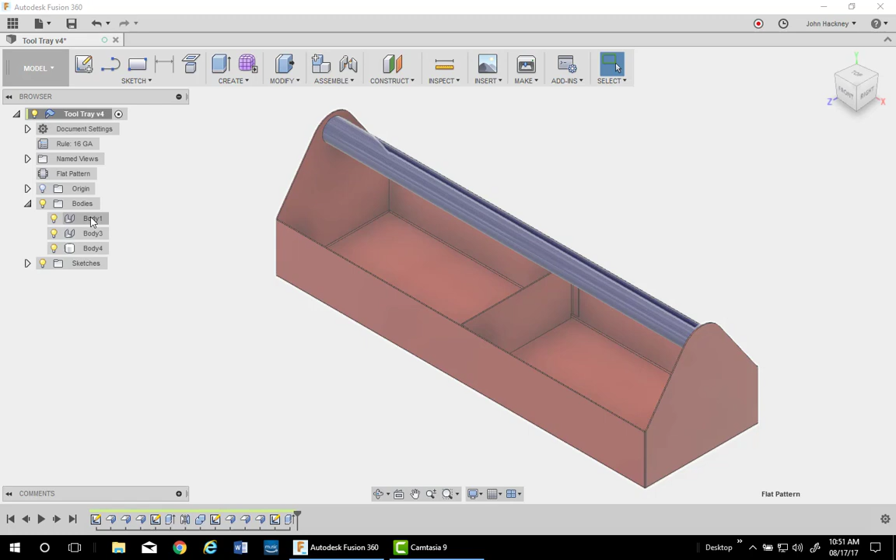I would like to demonstrate the sheet metal functionality of Autodesk Fusion 360 to make this tool tray. It consists of three bodies, the main body and a divider. The handle is not a sheet metal piece, so I will not be making that, just a piece of pipe. Let's get started.

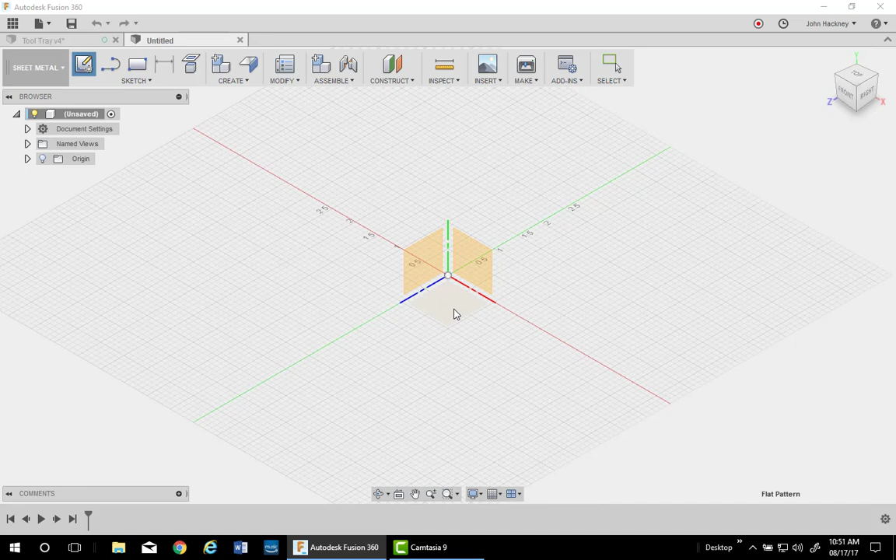Switch to my sheet metal environment. I've already pre-configured my sheet metal style. It's a piece of 16 gauge, which has a very narrow gap for a linear weld. So I'll go ahead and make my sketch on the XZ plane. I'll do a 2-point rectangle.

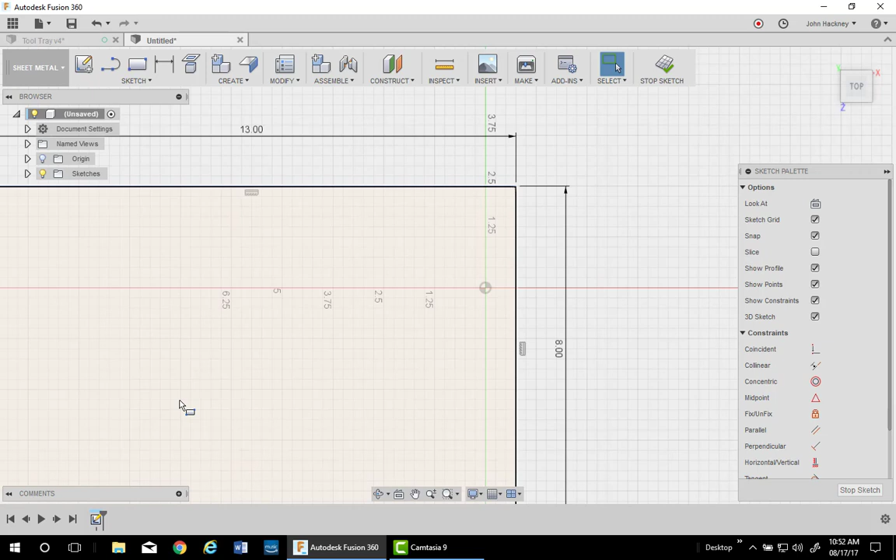I'm a fan of sketching off the origin so I can see the sketch constraints work. My total tool tray is 26 long, so I'll make this 13 and 8 wide, and I have my rectangle. Now I need to center this edge up on the origin. A coincident constraint from the origin to the midpoint. Now you can hold down the shift key and find the midpoint very quickly. Very nice tool.

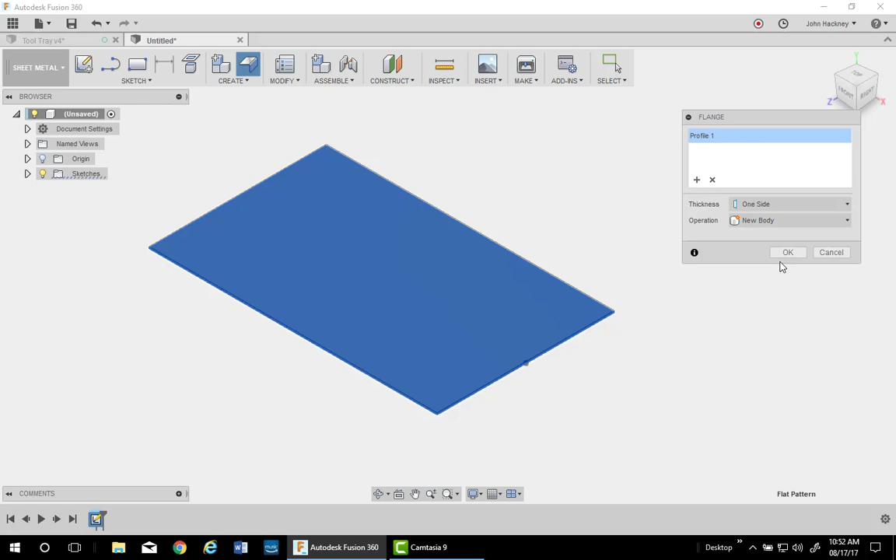Now if you have a closed profile and use the flange tool, you get a face. So there's my 16 gauge face. Now let's go ahead and make the flanges. I need 3 of them, so I select 3 edges and I'm going to drag them up 4 3/4. You can also type it in if you want.

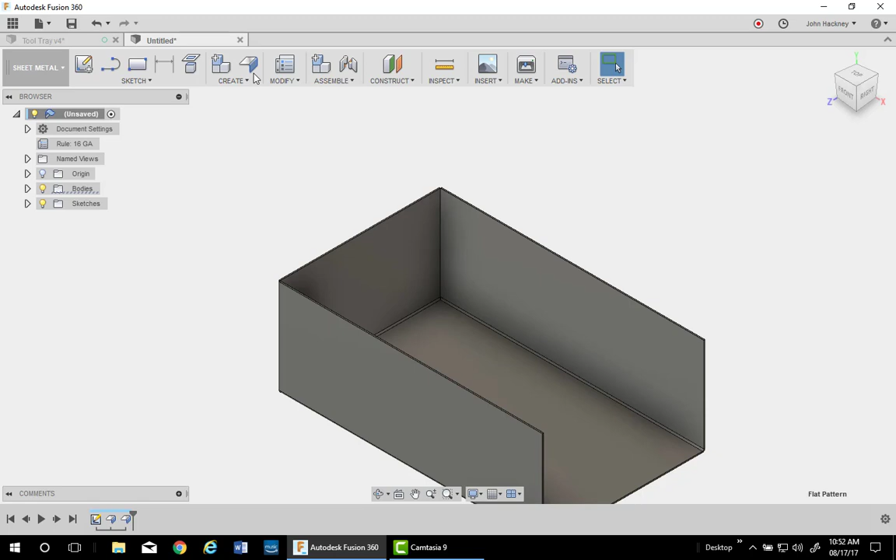Now I need that end section. I actually need a face up here hooked to a face. There is no tool for this, but the flange tool works very nicely for it. You can pick either the inside or outside edge. It's up to you. I'm going to drag it out to 6 inches. That's how high it is. You can type the number in if you want.

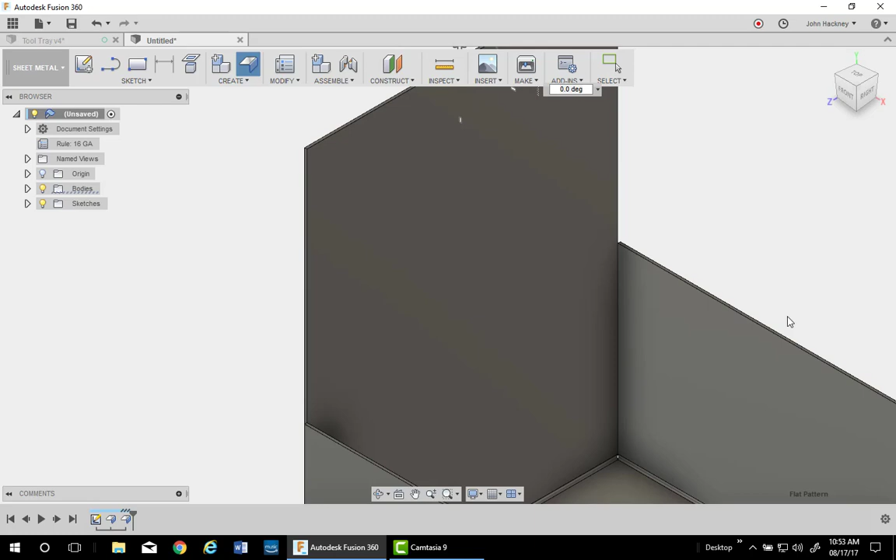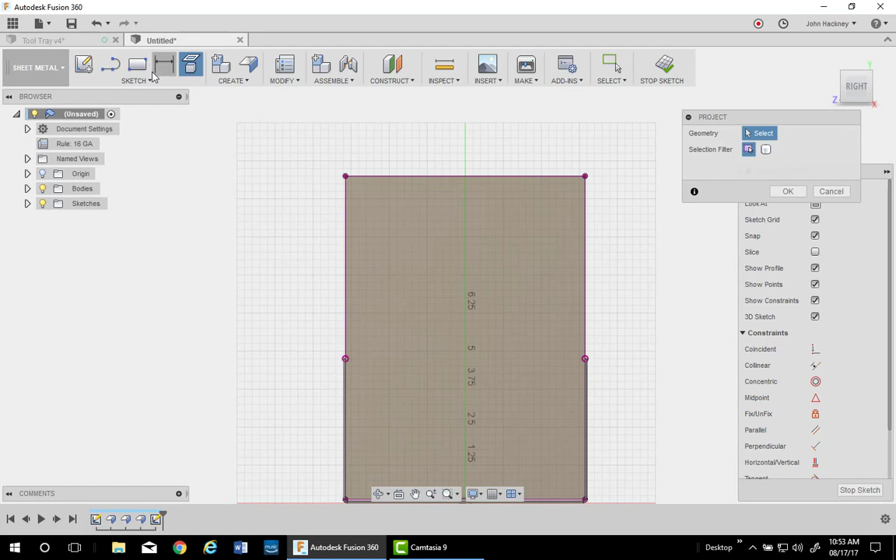And then basically I'm going to drag it around to 0 degrees. That will merge it into a face. Really cool. Now I need to get my profile on the end. So I'll do a sketch on this surface and project 2 points for my sketch. I also need this edge, so I'm ready to go. I'm going to sketch from this point, hold down my left button to make a curve, and then down to this point.

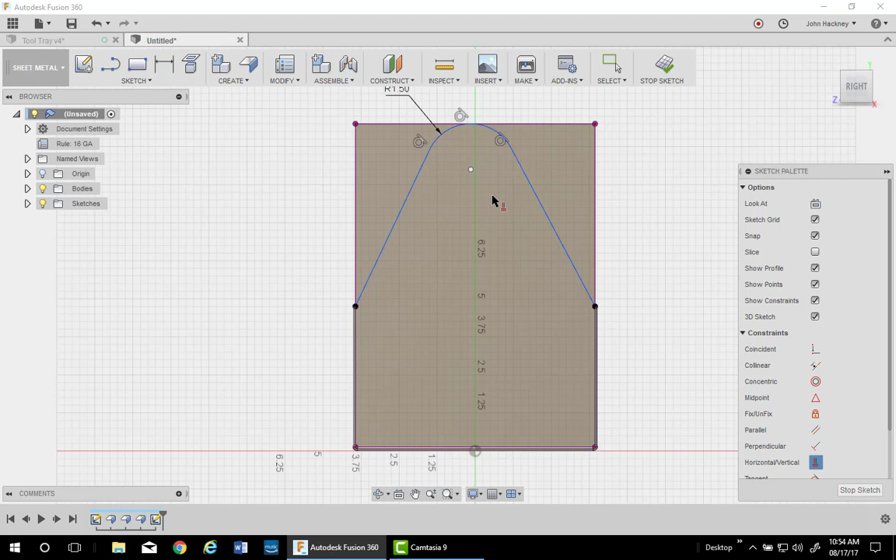Add a couple constraints. I missed a tangent constraint right here, and also want it to be tangent to the top. Okay, so now I'm ready to go ahead and dimension that radius to make it fully constrained. Come on. Here we go. 1.5. My center is not constrained over top of the midpoint, so I'll do a vertical between the center and the midpoint. I am fully constrained.

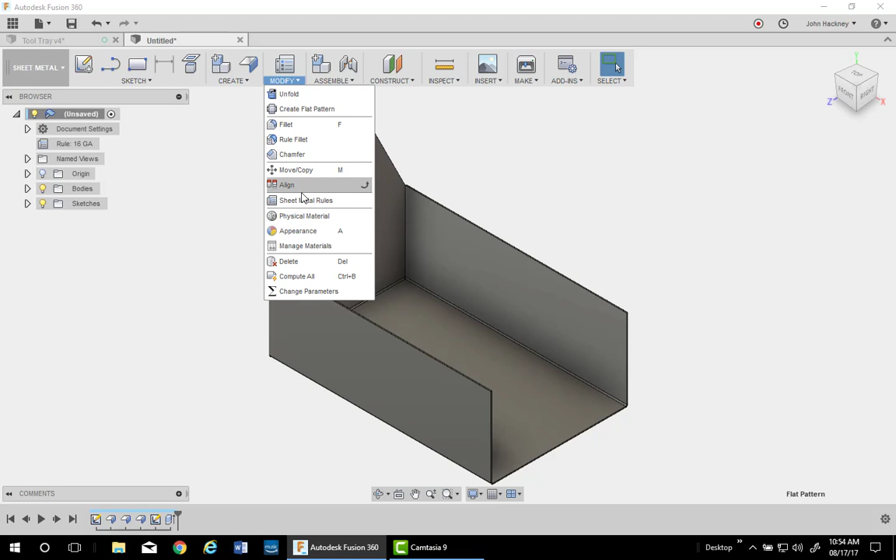Now I do an extrude and pick 2 profiles. I want to go all the way through, and I'm going to flip it. Be sure I'm going the right way and say OK. There you go. Now this is one body. Let's just do an unfold just to show you. Let's see, create a flat pattern and say OK, and there's my flat pattern for half of it. Let's go ahead and finish.

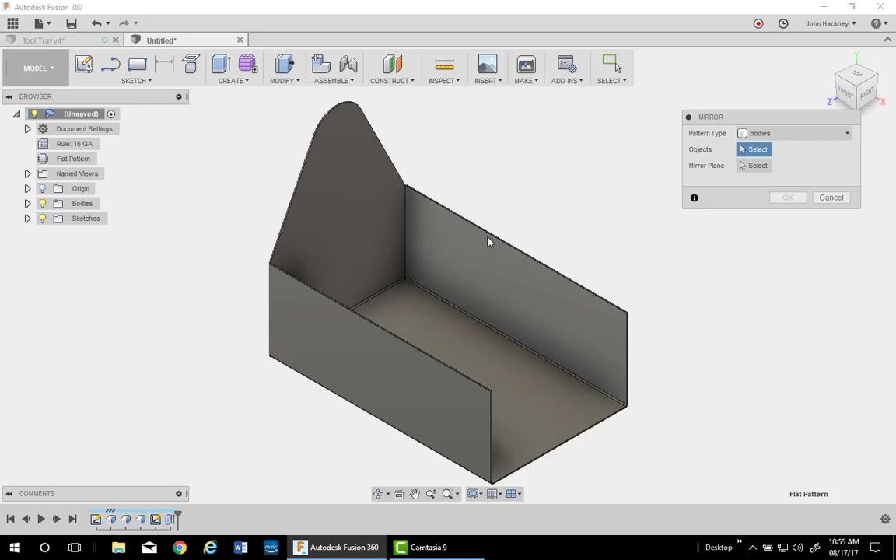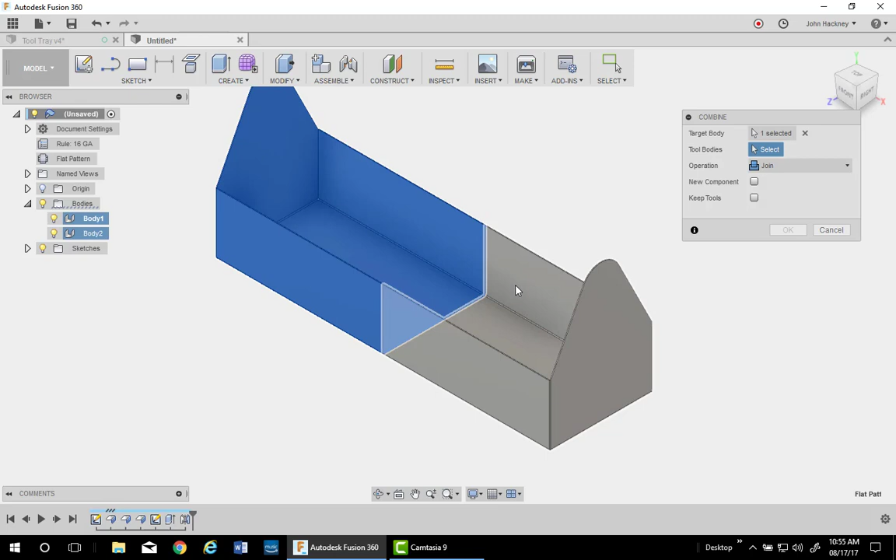Now I'm going to move to my modeling environment to mirror this. This is a cool function you can do with sheet metal. You can mirror. I will be mirroring by bodies, so I pick this body. The mirror plane will be the YZ plane, and I now have 2 bodies, as you can see. I want to join them together. I'll use the combine tool in the modeling environment, pick on the target body and the other body, and say OK. Now I have one body.

And please note that the flat pattern is now out of date. I can update it, and you now have a different flat pattern. So it's really cool, you can mirror and still maintain the sheet metal functionality. Let's do the divider. I'll make a sketch on the bottom surface. Let me pick on that. Make a new sketch. Where is my sketch? Come on now. There we go.

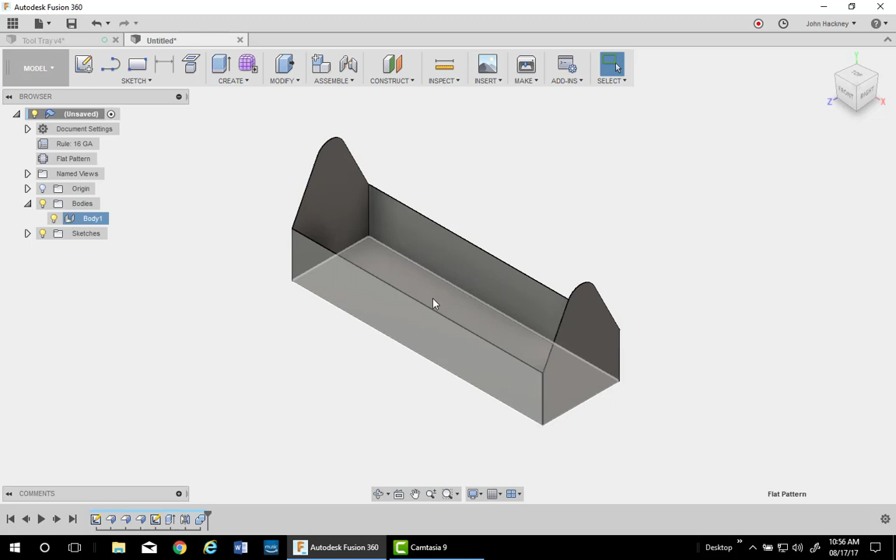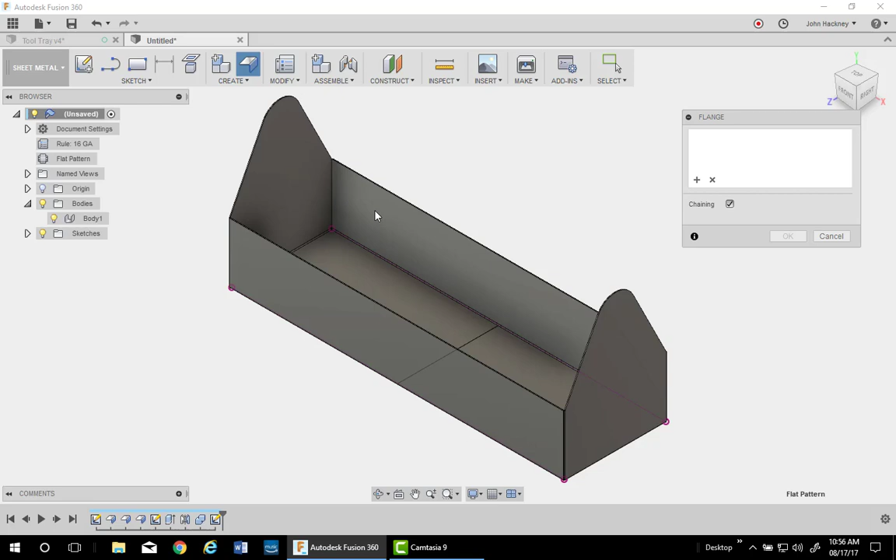Now I want to be very careful and draw a line from the inside face of the sheet metal to the other side on the midpoint. Okay, so now I'm going to make a flange, or actually a face. So I pick my sheet metal tool, go back to sheet metal, pick on my flange, which is going to be a contour flange. I can click on this edge and make it pick up that distance automatically, so I don't have to measure that odd dimension. Say OK.

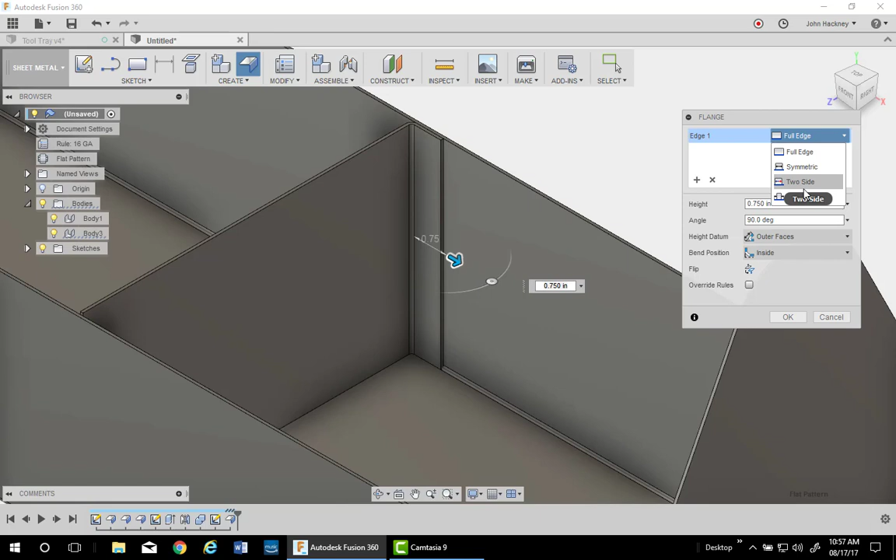Now I've got a problem down the corners. So what I'm going to do is a flange on that corner. I'm going to drag it out 3/4 of an inch. You can type that in also. Now notice you have the function here. You can do all sorts of different things with the ends, the edges. You can do a symmetrical drag like that.

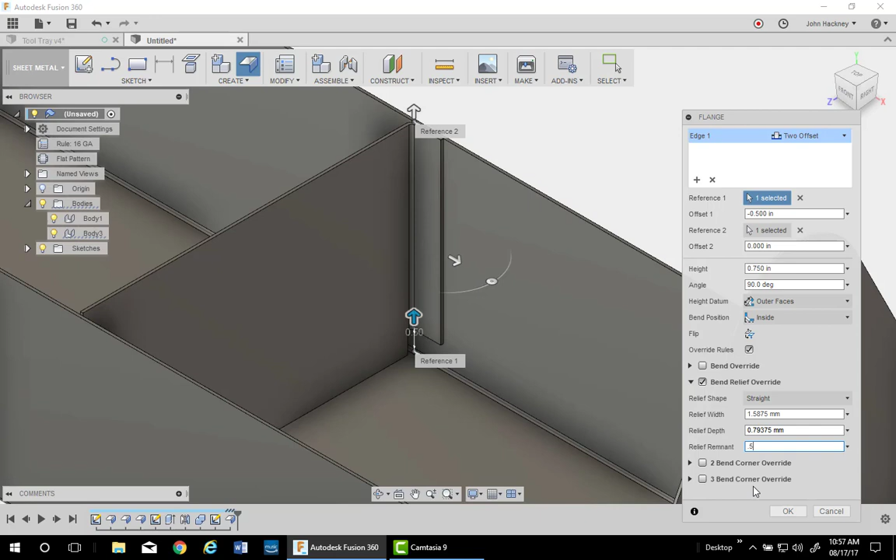I don't want that. I want a two offset, so I'm going to drag just the bottom one up, excuse me, a half inch. You can type that in, but I dragged it up. Now I want to override to get rid of that minimum remnant. So I just change my override down here and make my minimum remnant half inch to get rid of that overlap, and say OK, and that gets the corner free for me.

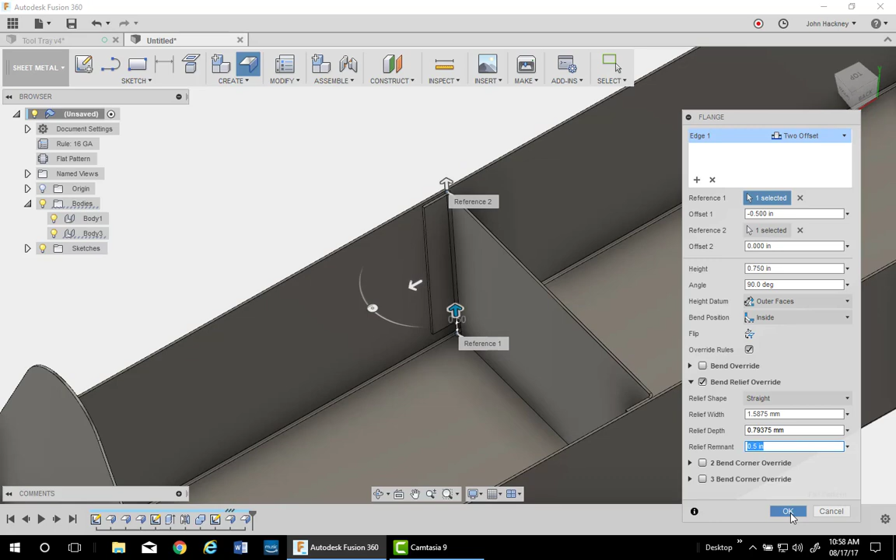I'm going to just repeat this so you can see it on the other side. Flange, pick the edge, drag out 3/4, change to offset, one side, drag it up half inch, and then override my bend rule, and it should be there. I just pick it from the list, half inch, and say OK. So there you go.

Your sheet metal box tool tray with a divider very quickly. Now remember, the flat pattern is for the box. If you need a flat pattern for the interior divider, you simply erase one and create the other.